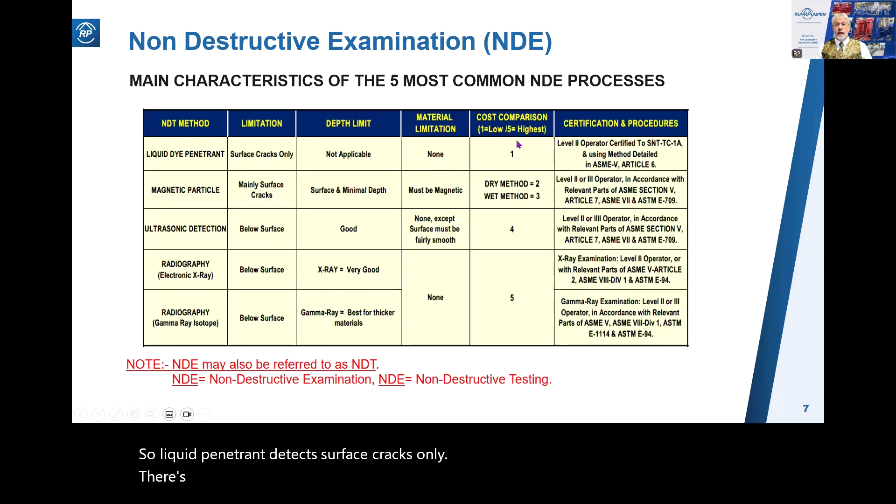Here we see the main characteristics of the 5 most common NDE processes, their limitations, and their comparative costs. Liquid penetrant detects surface cracks only, there's no material limitation, and it's the least expensive. Magnetic particle detects mainly surface cracks, but it will take some just below the surface. Material must be magnetic, and it's inexpensive.

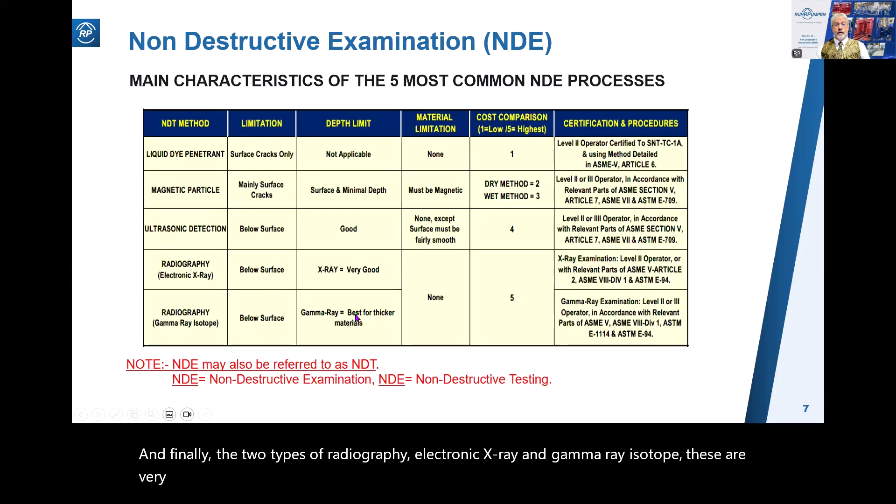Ultrasonic detection detects below-surface cracks and flaws. No material limitation except it must be fairly smooth, and it's more expensive. Finally, the 2 types of radiography, electronic X-ray and gamma ray isotope, are very good for below-surface cracks, gamma ray being better for thick materials. The cost comparison is expensive, and not just expensive, it takes a lot longer. You might turn a pump that would normally be on a 9-month delivery time into a 12-month delivery time.

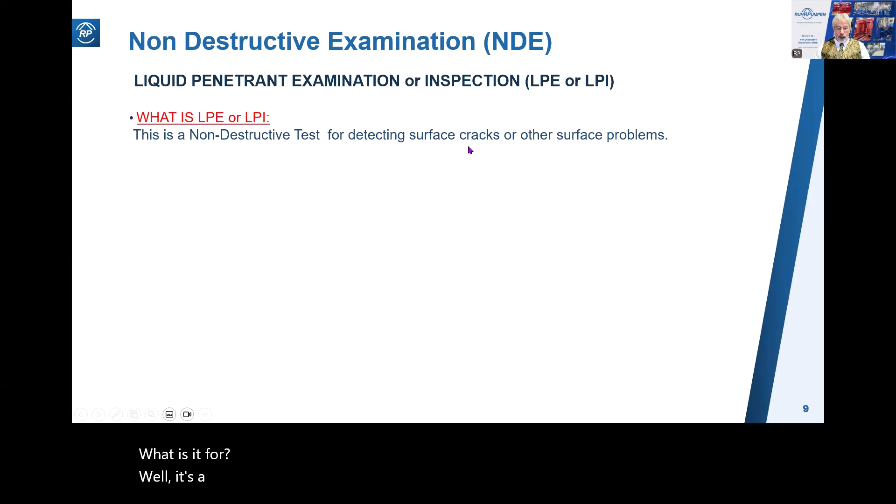So we're going to look at all of these 5 in the coming slides. We start with liquid penetrant examination or inspection. What is it for? It's a method of detecting surface cracks or surface problems. How does it work? It's based on the idea of surface tension and capillary action.

A thin liquid is spread over a crack, and the resulting capillary action will draw the liquid into the crack. Then, by removing the excess liquid from the surface, the liquid remaining within the crack can be made more visible by use of a developer. This will draw the penetrant back out of the crack or flaw and allow it to be clearly seen.

So what interpretation is required? The length and the shape of the crack are clearly visible, right there in front of you. But how it was caused is not. It only detects surface flaw detection, and doesn't show how deep the crack is or how far it extends. So we would need to do excavation grinding of the part to establish the extent of the problem.

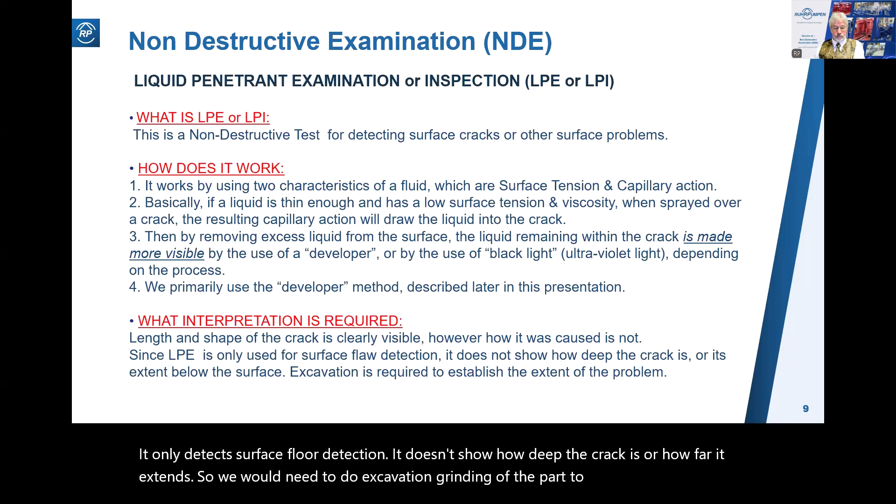These are the process steps. Pre-cleaning: you need to remove any dirt, paint, oil, grease, or any loose scales that would cause false indications. You then apply the penetrant to the surface being tested and allow it to stand for 10 to 30 minutes to allow time to soak into any flaws by capillary action.

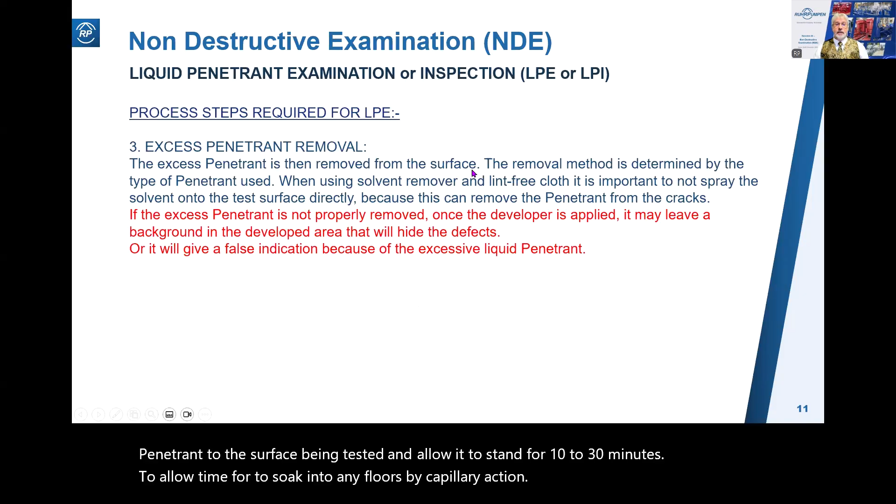Remove the excess penetrant and then apply the white developer to the sample. This draws the penetrant from the defects out onto the surface to form a visible indication.

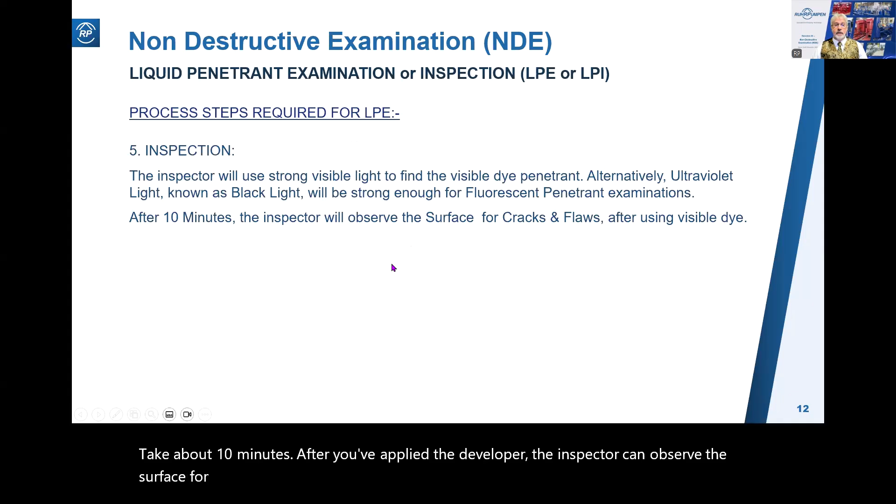Finally, inspection. Take about 10 minutes after you've applied the developer. The inspector can observe the surface for cracks and flaws. And finally, cleaning after the inspection and recording the defects. Got to remember, you're probably going to paint this pump afterwards, so you want to make sure it's nice and clean after the non-destructive examination.

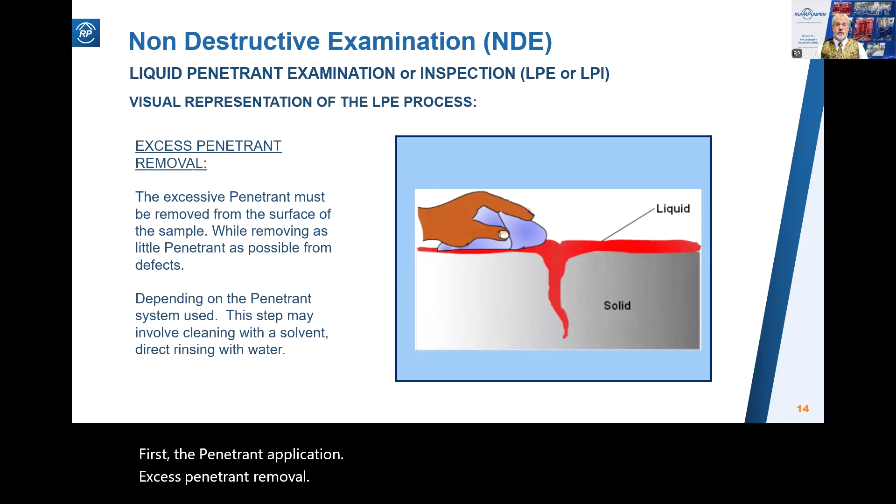So here's a visual representation of what I've just told you. First, the penetrant application. Excess penetrant removal. Application of the developer. And finally, inspection. But here are the primary advantages now.

LPE has a high sensitivity to small surface cracks. It can be used on many materials: metallic, non-metallic, magnetic, non-magnetic, conductive, and non-conductive. Important thing is, as long as they are non-absorbent.

LPE can cover large areas and large volumes. It can be inspected quickly at low cost. Even complex shaped parts can be easily inspected. The indications are produced directly on the surface of the part and show a visual representation of the cracks.

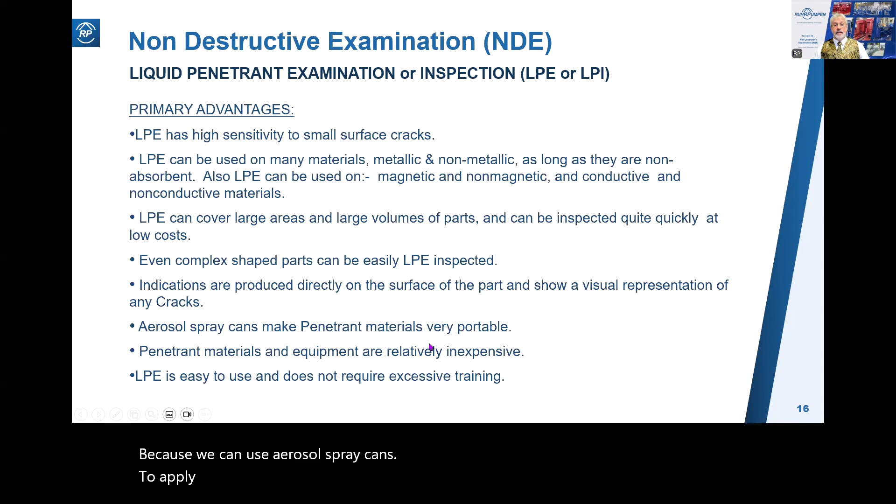Because we can use aerosol spray cans to apply the dye penetrant and the developer, it makes it very portable and inexpensive. Easy to use, doesn't require excessive training, which makes it very useful for using in pump assembly shops, for example.

The disadvantages: only surface breaking defects can be detected. It doesn't see faults that are below the surface. Must be non-porous.

Pre-cleaning is critical since paint or contaminants can hide the defects. It doesn't work on a painted piece of metal. You need to remove the paint before using LPE. Surface finish and roughness can affect the inspection sensitivity.

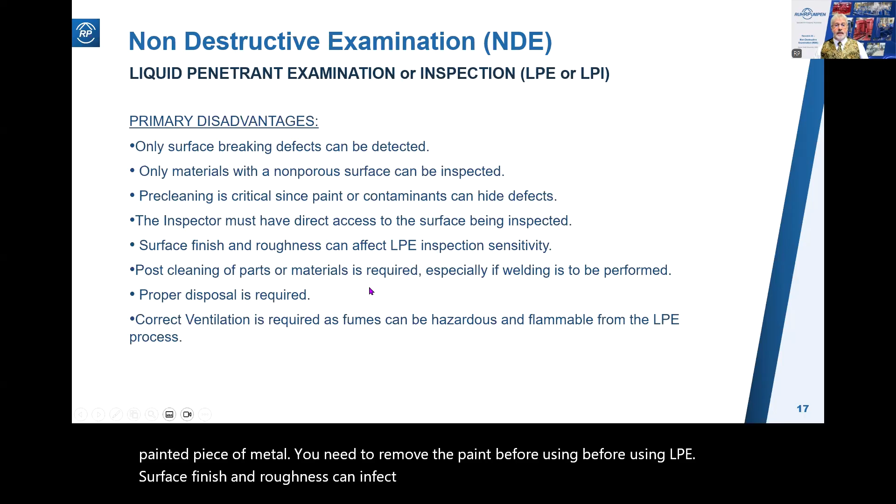Post-cleaning of parts is required, especially if you're going to be welding. But this is equally true of all the non-destructive examination techniques I'll show you today. Need to consider carefully disposal and ventilation, as the materials we're using might be hazardous and flammable.

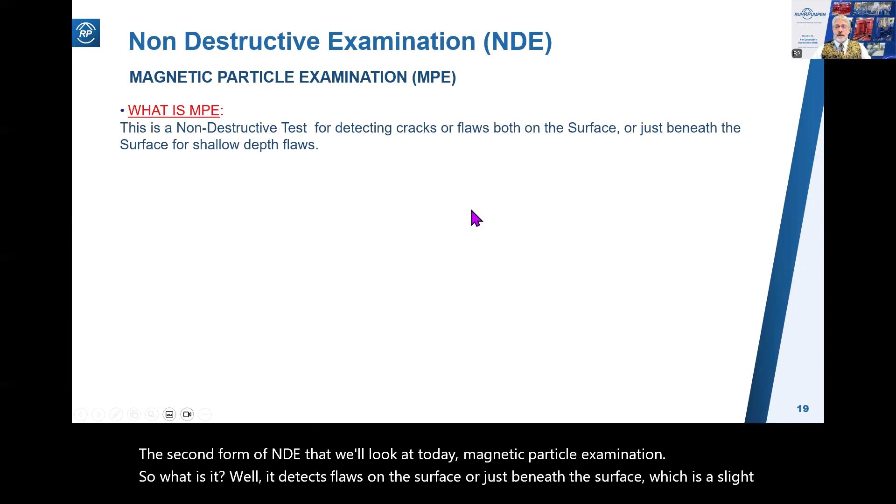So that's LPE. The next one we'll look at is MPE, magnetic particle examination. So what is it? Well, it detects flaws on the surface or just beneath the surface, which is a slight advantage over liquid penetrant examination, which will only see surface breaking cracks.

How does it work? Well, by magnetizing the part being examined. So that means it can only be used on ferromagnetic materials such as steel, iron, or nickel. The magnetic field that is invoked will change at or near a crack or flaw, which can be made visible by the use of iron filings spread over the component.

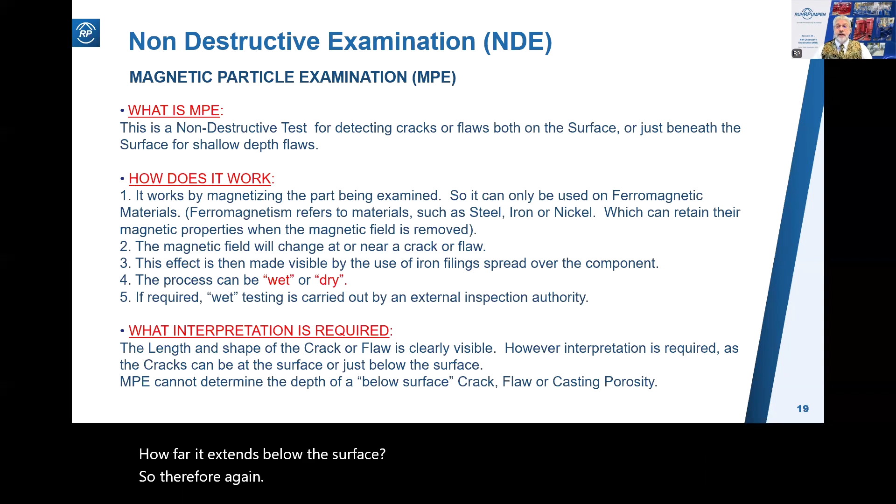What interpretation? Well, the length and the shape of the crack or flaw is clearly visible. However, some interpretation is required as the crack can be at or near the surface, and you can't see how far it extends below the surface. So therefore, further grinding and excavation is needed to see how far the flaw extends.

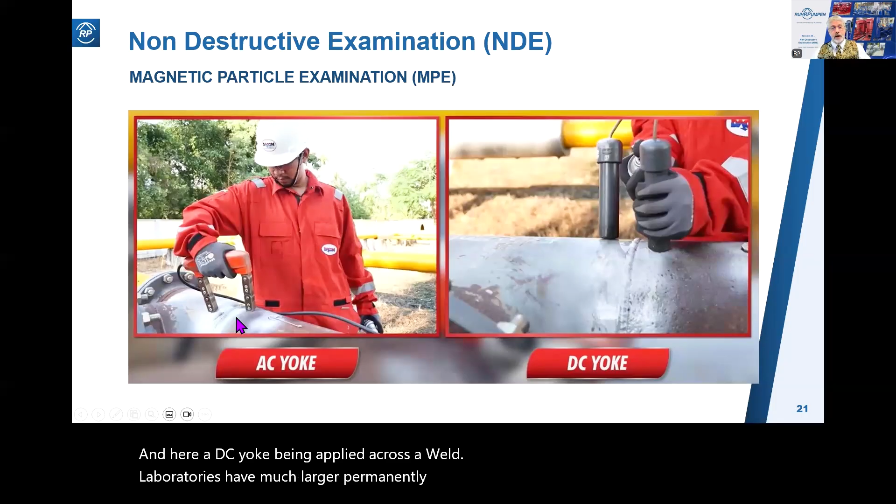Here are the tools to carry out MPE in the field or in the pump workshop. So here is an AC yoke and here a DC yoke being applied across a weld. Laboratories have much larger permanently installed machines for these, but this is typically what will be used in a pump workshop or out in the field.

So here are the process steps. Firstly, for dry magnetic particle examination, and we'll look at wet particle examination afterwards. So first, preparing the surface - it must be free of grease, oil, or other moisture, which could keep particles from moving freely within the magnetic field.

You can carry out MPE on a painted surface if the paint is not too thick. It is less sensitive than it would be on bare metal, but it will work. And this is an advantage over LPE, which cannot be used on a painted surface.

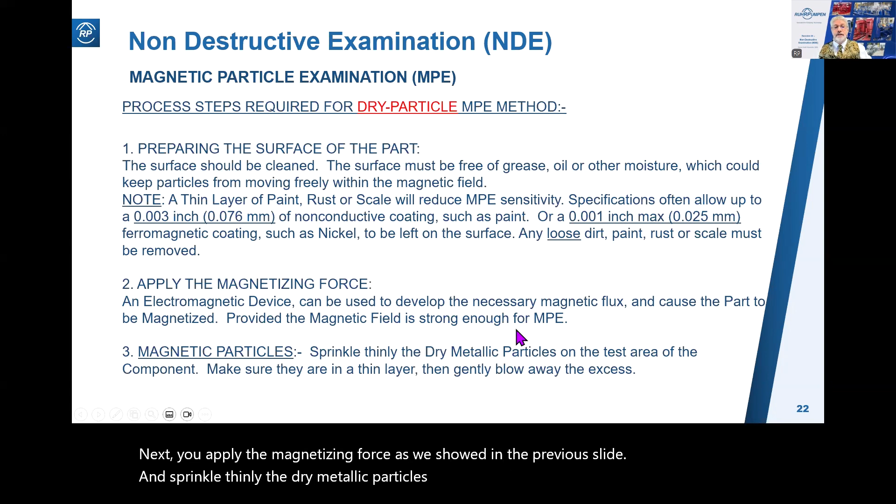Next, you apply the magnetizing force, as we showed in the previous slide, and sprinkle thinly the dry metallic particles, the iron filings, on the test area. A thin layer only, and gently blow away the excess.

Switch off the magnetizing force, and then inspect for indications. You look to see where the magnetic particles are clustered.

Note that in order to see a flaw, the flaw must be transverse to the magnetic flux. In other words, the magnetic field lines, the magnetic flux, runs in this direction, so it will only detect a crack that is at right angles to the direction of the magnetic field. This means cracks and flaws in line with the magnetic flux won't be detected.

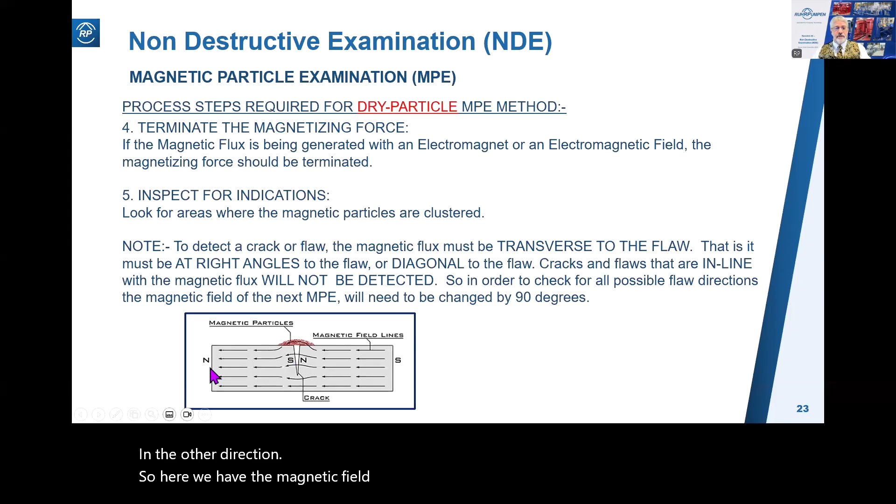So what you'd have to do is a second test in the other direction. Here we have the magnetic field running from right to left. We'd have to do one running from top to bottom in order to see the other cracks and flaws in the other direction. It's then essential that we carry out demagnetization before repeating this test at 90 degrees, or before moving on to the next process in production. I'll cover demagnetization in a few slides' time.

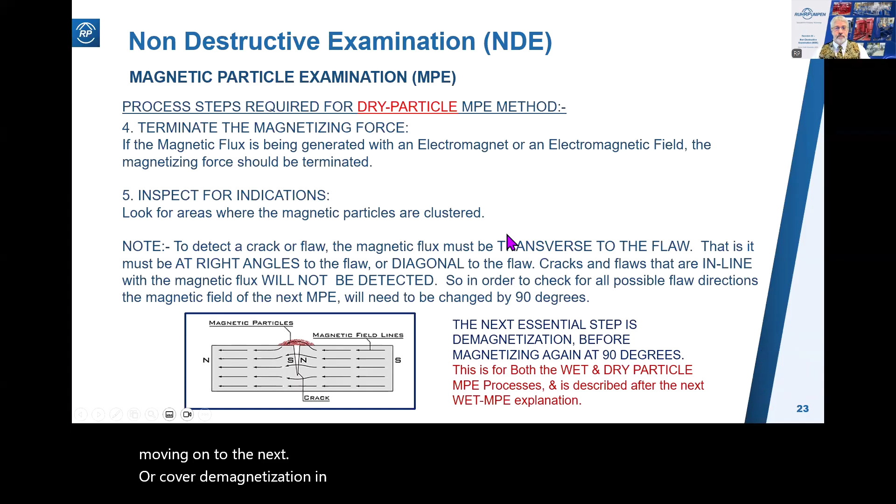The wet particle MPE method: we use smaller wet suspension particles in a carrier liquid rather than dry particles. Wet particles are smaller than the dry particles, the iron filings.

The advantages wet particle has over dry particle MPE: you can quickly spray a uniform layer of particles over the entire surface of the component, even large areas. The liquid carrier allows the small wet particles to float into small cracks, so it's considered better than dry particles for detecting very small cracks on smooth surfaces.

It comes in two types, fluorescent and non-fluorescent. The fluorescent ones glow in the dark when exposed to ultraviolet light, making it easier to detect surface faults in the component. We'll show that in a few slides' time.

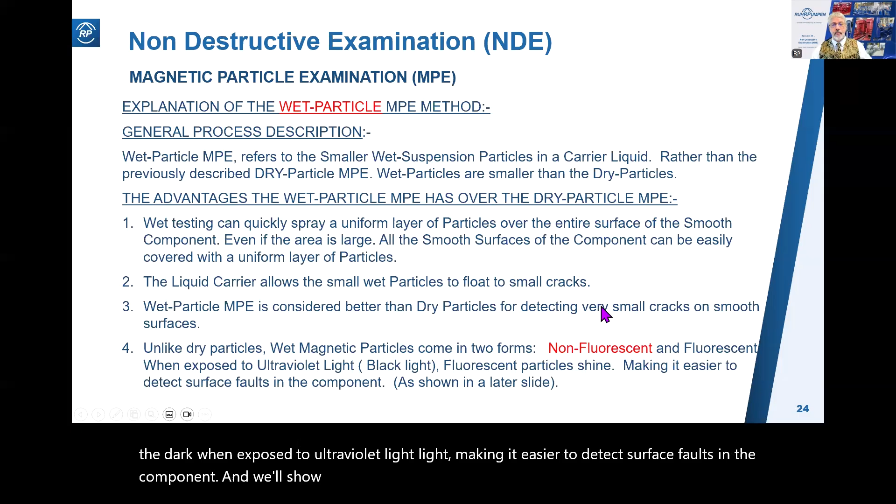These are the process steps for the wet particle MPE method. It's a little different from the dry particle method. First is the same: preparing the surface of the part. It must be free from grease, oil, and moisture. A thin layer of paint will be okay.

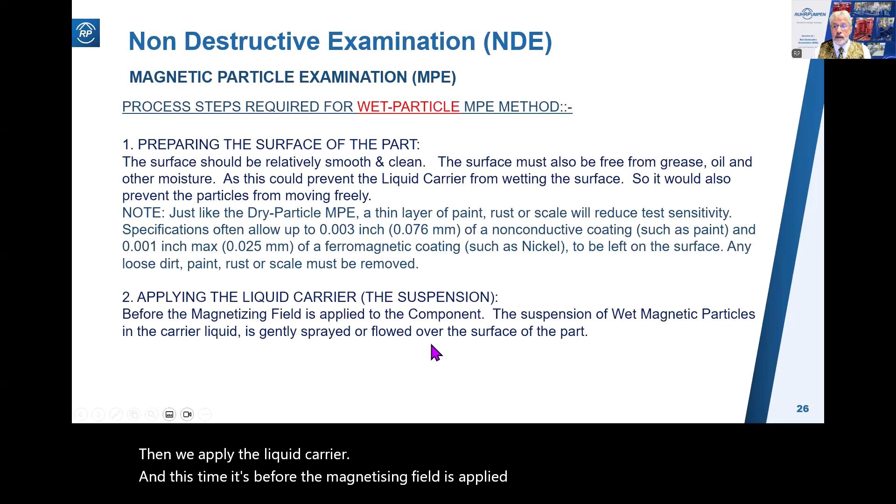Then we apply the liquid carrier. This time it's before the magnetizing field is applied to the component. The suspension of wet magnetic particles is gently sprayed or flowed over the surface of the part.

Then we apply the magnetizing force. It's applied in 2 or 3 short bursts, 2-second bursts. The resulting kinetic energy makes the wet particles overcome surface tension and viscosity and allows them to flow over the component and into any flaws that should be there.

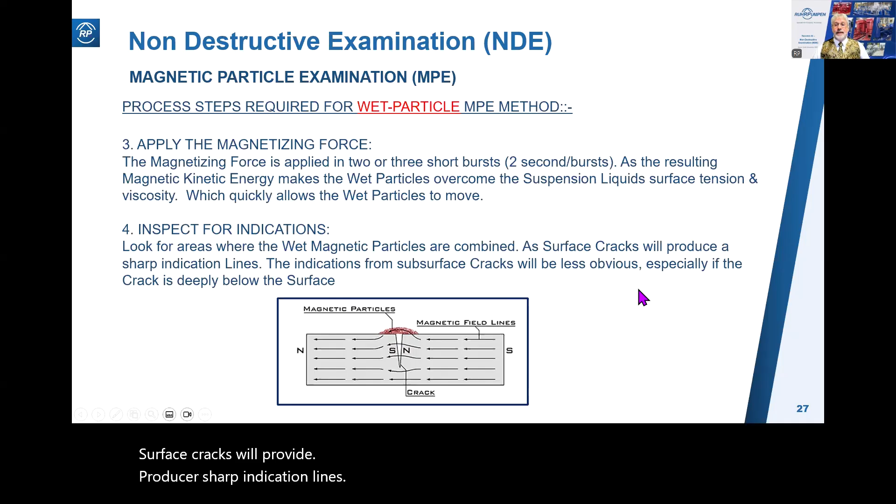Then we inspect for indications. We look for the areas where the wet magnetic particles are combined. Surface cracks will produce sharp indication lines. Subsurface cracks will be less obvious, especially if the crack is deeply below the surface.

Again, the magnetic flux must be transverse to the flaw. In other words, the flaw must be at right angles to the magnetic flux. If they're in line, they won't be detected. So then we need to do a second test at right angles to the first one.

We terminate the magnetizing force and then demagnetize the tested component. This is very important, critically important. If magnetization is left in the component, and welding is going to be performed, you can create a condition called arc blow, which can cause the welding arc to be deflected and the molten filler metal may be repelled from the weld.

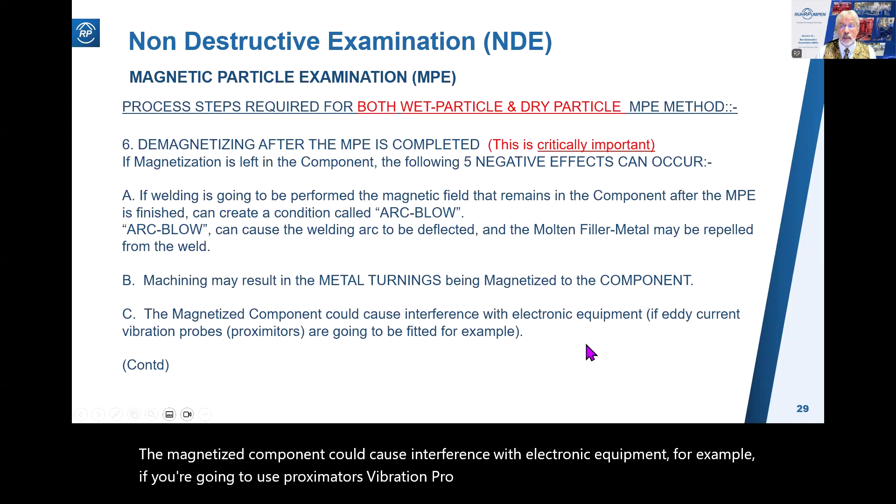Secondly, any machining could result in metal turnings being magnetized to the component. The magnetized component could cause interference with electronic equipment. For example, if you're going to use proximitors, eddy current vibration probes, they would be interfered with by the magnetic field.

Assembly with other components could be made more difficult by magnetic attraction between components, and it could also cause abrasive particles to cling to bearings or wear surfaces.

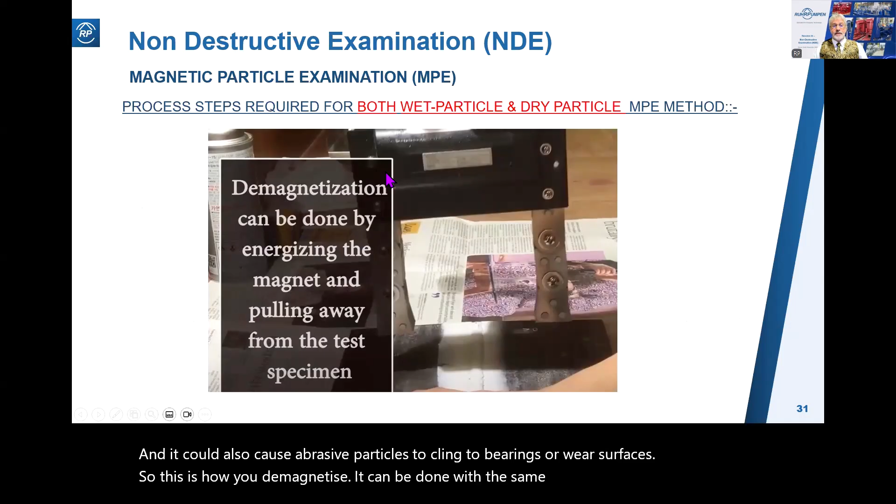So this is how you demagnetize. It can be done with the same yoke used to magnetize it: you energize it and then pull it away vertically from the test specimen. You might have to do this 3 or 4 times.

You do a residual magnetism check using a Gauss meter to confirm the demagnetization and that there's no residual magnetism left. You'd apply it and check the whole area around where you've done the magnetization.

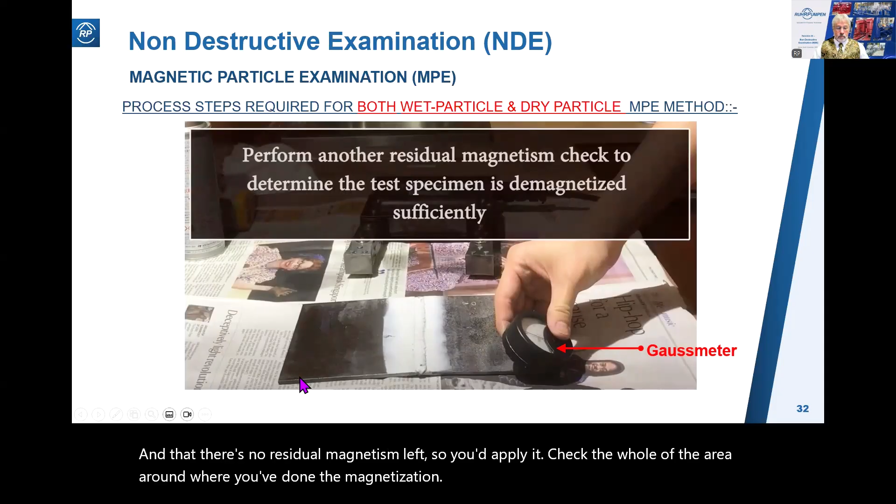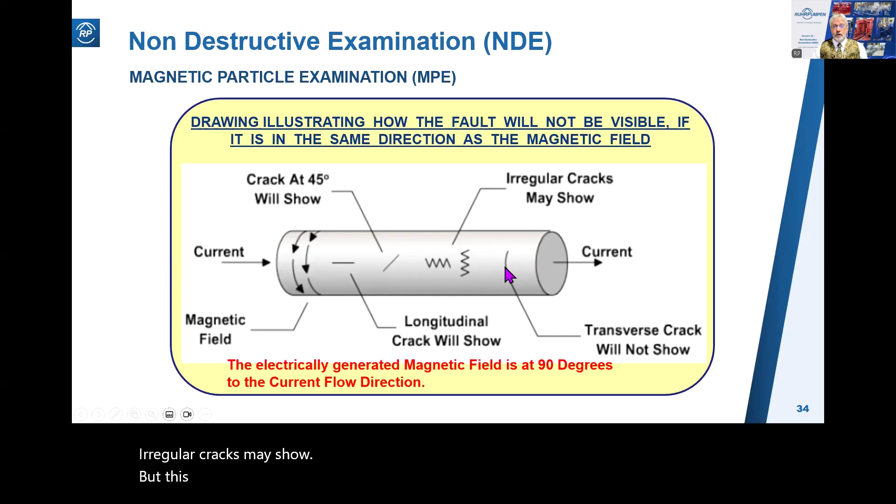This slide illustrates how a fault will not be visible if it's in the same direction as the magnetic field. Here we have the current going from left to right, so the magnetic field is vertical. The longitudinal crack will show, this diagonal crack will show, and irregular cracks may show, but this transverse crack will not show. What we have to do is demagnetize and remagnetize with the current going top to bottom so that the magnetic flux is along the shaft. Then this transverse crack effectively becomes a longitudinal crack as far as the analysis is concerned.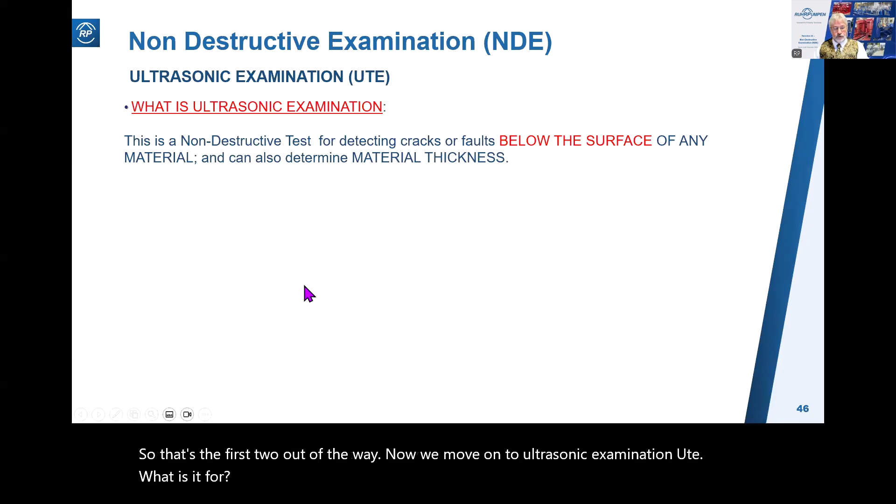So that's the first two out of the way. Now we move on to ultrasonic examination, UTE. What is it for? It detects below-surface cracks. How does it work? It works by bouncing a high frequency sound wave off any subsurface discontinuity. Any crack or fault within the component will cause a change in the reflection of this ultrasonic signal, which shows up on the diagnostic machine. The signal reflection and strength can be used to determine the depth, size, and shape of the crack or fault.

It does take a lot of skill and training. Pump suppliers will seldom have this expertise in-house. They'll usually bring in a specialist contractor or send the part to be examined to a laboratory.

There are two modes of operation: reflection and attenuation. First, we'll look at the reflection technique, which uses a single transducer as both sender and receiver. Here's the transducer sending out a signal which bounces off the back face of the sample back to the receiver. Here again, this time there's a crack in the way, so it's bouncing off the crack back, and it'll tell us how big and where that crack is.

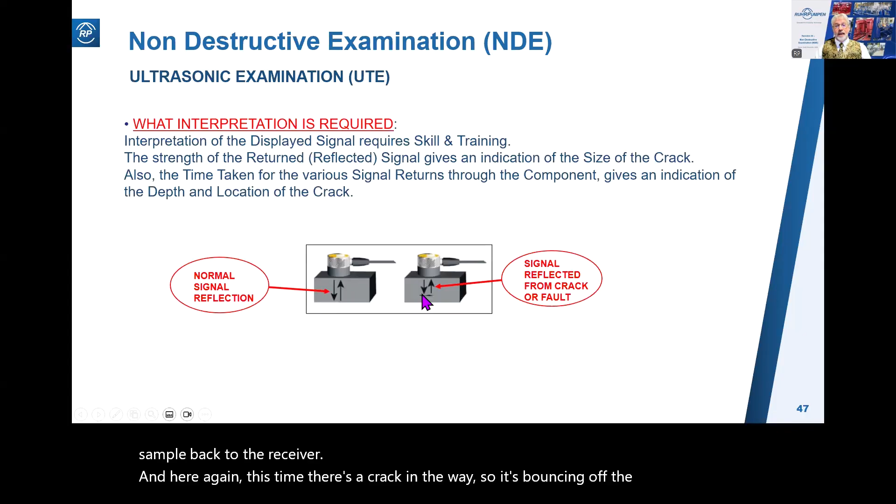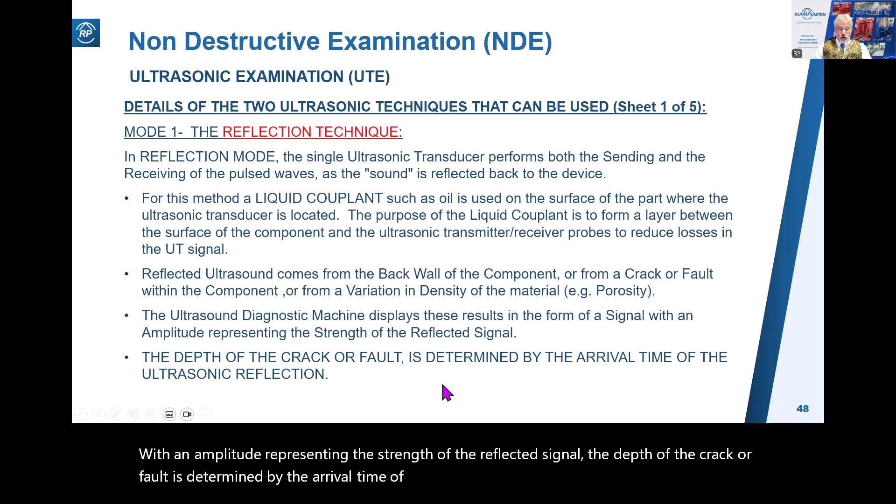For this method, a liquid couplant, such as oil, is used on the surface of the part where the transducer is located, to ensure you've got a good clean signal going through. The reflected ultrasound comes from the back wall of the component, or from a crack or fault within the component, or indeed from variation in density, from porosity. The diagnostic machine displays these results as a signal with an amplitude representing the strength of the reflected signal. The depth of the crack or fault is determined by the arrival time of the ultrasonic reflection. And that's the joy of UTE - you get to see how deep within the component the flaw is. You don't get that with LPE or MPE or even RXE.

Now, the attenuation technique uses two probes, a transmitter and a receiver. The transmitter sends the ultrasound through one surface and a separate receiver detects the amount that has reached it on the opposite surface after traveling through the component. This time we need to put liquid couplant on both surfaces. Cracks or faults in the space between the probes allow the depth of the cracks and faults to be detected.

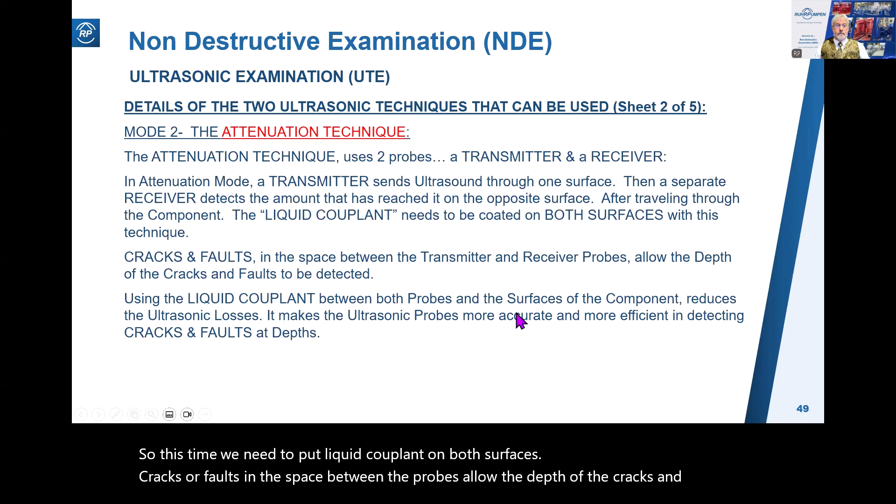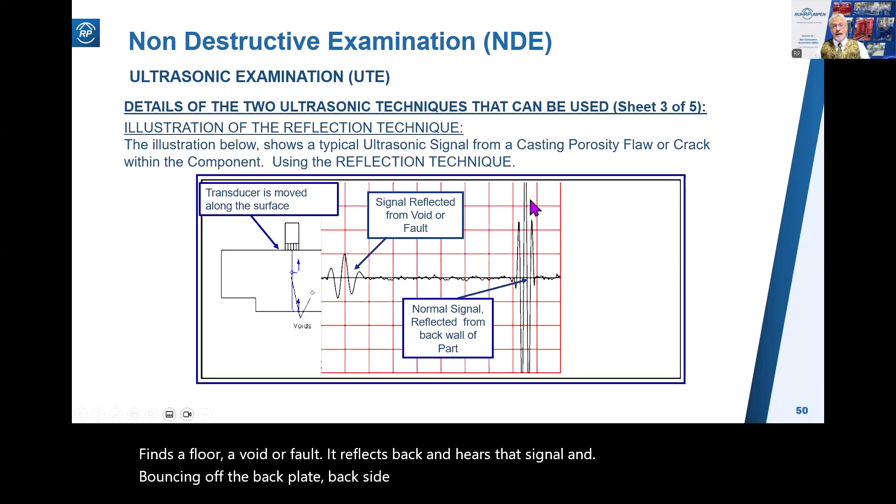Here's an example illustrating the reflection technique. The transducer moves along the surface of the component, and when it finds a flaw, a void, or fault, it reflects back - here's that signal - and bouncing off the back side of the sample is this normal signal. So that's a reflection off the back wall, and there's the reflection off the flaw.

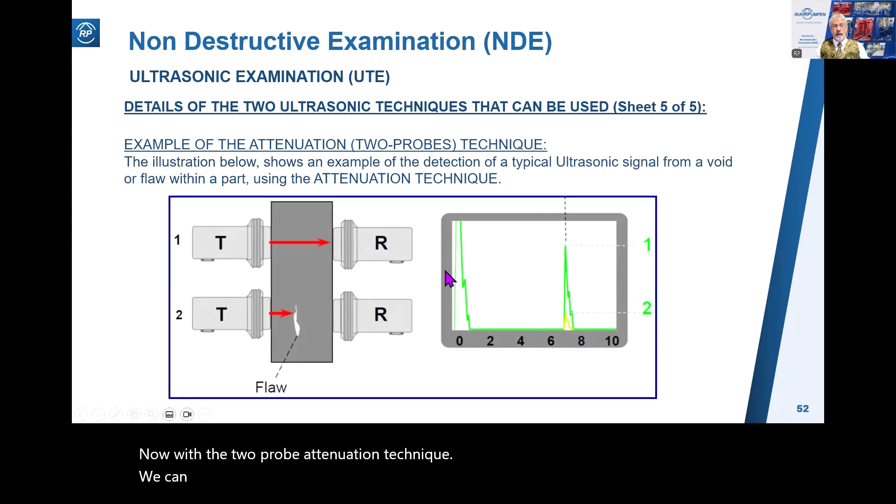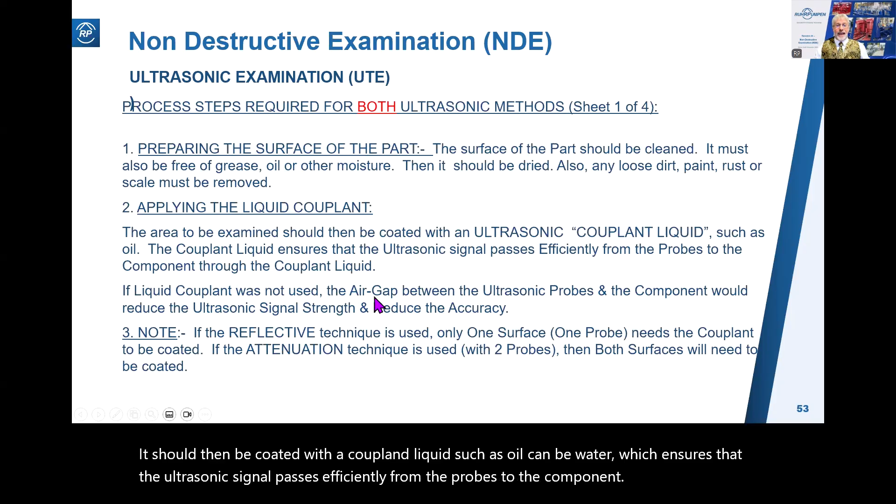If we're using the reflective technique, then only one surface needs couplant. If the attenuation technique is used, then both surfaces need to be coated.

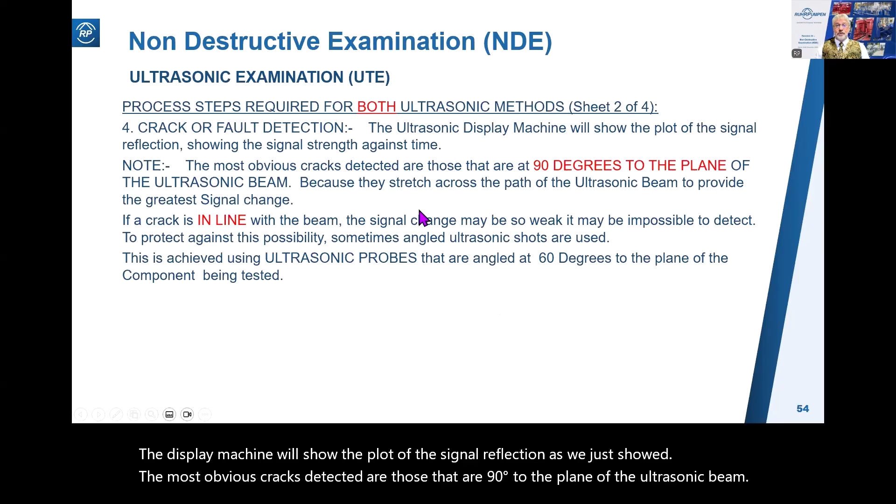The display machine will show the plot of the signal reflection as we just showed. The most obvious cracks detected are those that are 90 degrees to the plane of the ultrasonic beam, because they stretch across the path of the ultrasonic beam. If it's in line, the signal change may be so weak it may not be detected properly.

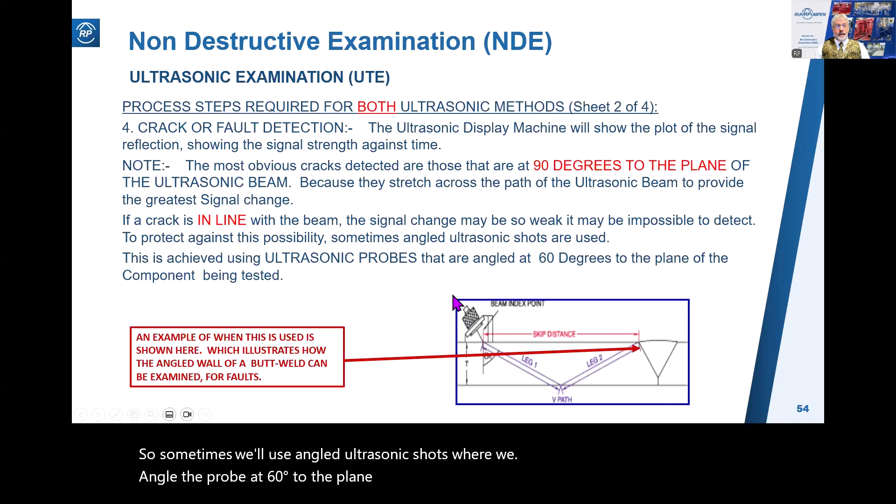So sometimes we'll use angled ultrasonic shots, where we angle the probe at 60 degrees to the plane of the component being tested. Like this, we're looking at a weld here, examining a weld. Here's the signal being sent in at 60 degrees, bounces off the back face, bounces off the weld back to the transducer.

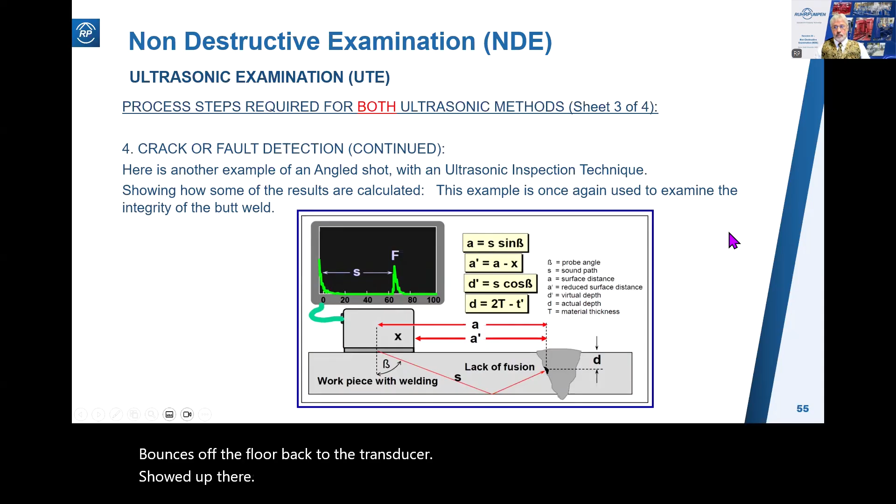Next stage, as usual, it's cleanup.

Here are the advantages of ultrasonic. 7 points showing the advantages. It has a high penetrating power, which allows detection of cracks and flaws that are quite deep in the component.

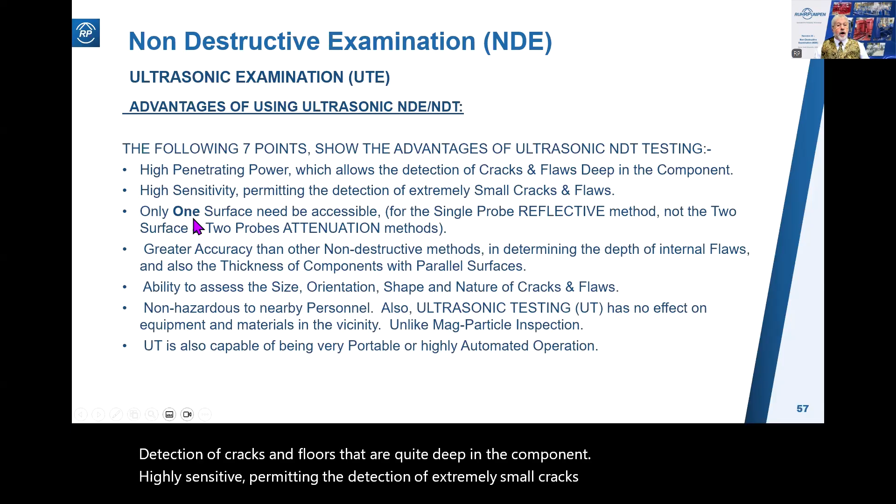Highly sensitive, permitting the detection of extremely small cracks and flaws. You only need one surface to be accessible, although you do get better results with the 2-probe attenuation method. But you can get good results with one surface.

It has greater accuracy than other non-destructive methods in determining the depth of internal flaws. It'll also detect the thickness of components that have parallel surfaces.

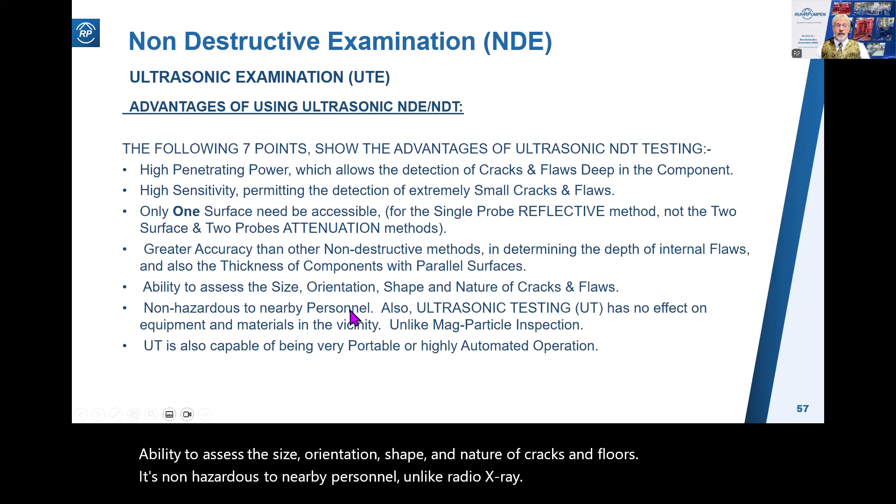Ability to assess the size, orientation, shape, and nature of cracks and flaws. It's non-hazardous to nearby personnel, unlike X-ray, where we're handling radioactive materials. And ultrasonic testing has no effect on the equipment and materials in the vicinity, unlike mag particle examination. It's also very portable and can be automated.

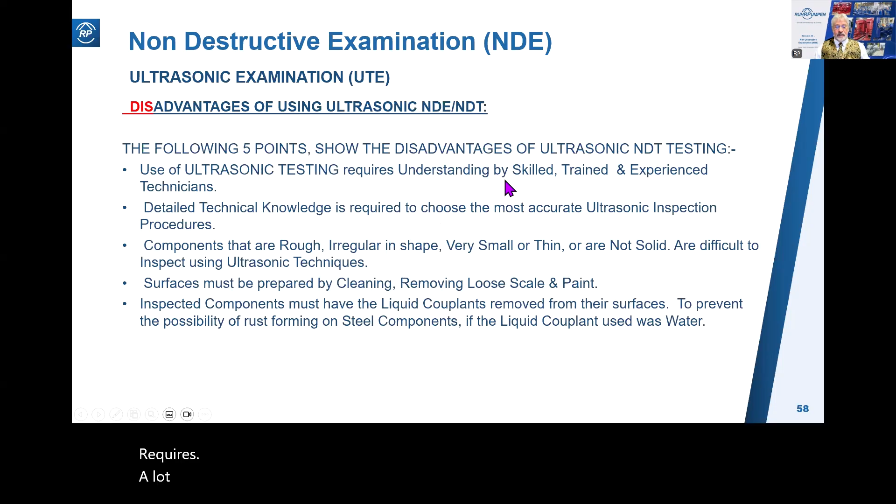The disadvantages: it requires a lot of understanding, skill and training, which pump suppliers will seldom have this expertise in-house. They'll usually bring in a specialist contractor or send the part to be examined in a laboratory.

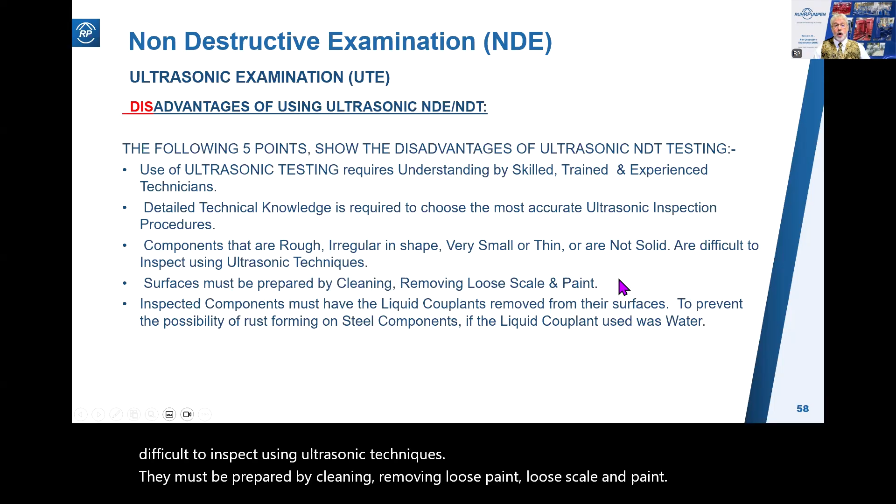Components that are rough, irregular in shape, very small or thin, or are not solid — these are difficult to inspect using ultrasonic techniques. They must be prepared by cleaning, removing loose scale and paint. Thin layers of paint are okay, but avoid any loose scale and loose paint.

That's UTE. The next one we'll be looking at is radiographic examination.

I'm just going to have a slurp of tea.

So radiographic examination, RXE. What is it for? It detects below surface cracks and defects. Again, it takes a lot of skill and training.

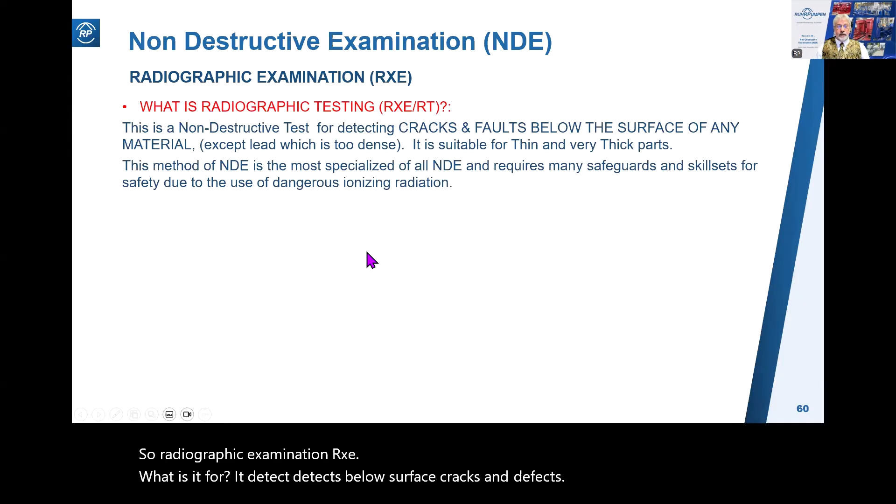How does it work? Two methods. Electronically produced X-rays by an X-ray generator — that's a bit like the X-ray generator at your dentist's. And the more powerful one is gamma rays issued by a radioactive isotope, which is better for very thick and heavy metal components.

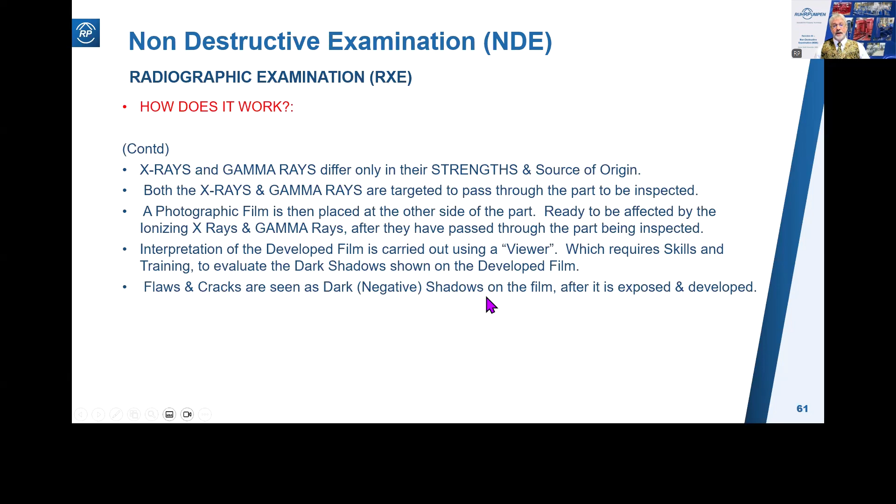In both cases, we are targeting the X-rays to pass through the part to be inspected. A photographic film is placed on the other side of the part, ready to be affected by the X-rays and gamma rays after they've passed through the part being inspected. The film is developed and then interpretation is carried out using a viewer, which requires skill and training to evaluate the dark shadows that appear. Flaws and cracks are seen as negative shadows on the film after it's exposed and developed.

So here are the two methods. The first one, the X-ray generation method.

Cathode ray tube contains a small filament similar to a light bulb. The electric current passing through the filament heats up and causes electrons to be stripped off.

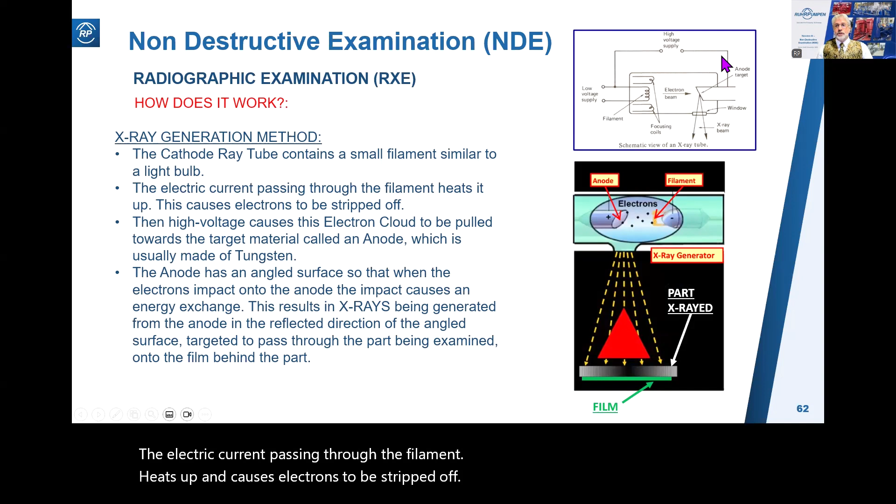The high voltage across this gap causes the electron cloud to be pulled towards the target anode, which is usually made of tungsten. The anode has an angled surface so that when the electrons impact on the anode, the impact causes X-rays to be generated from the anode in the reflected direction of the angled surface, so down in this case, through the part being X-rayed and impinging on the film.

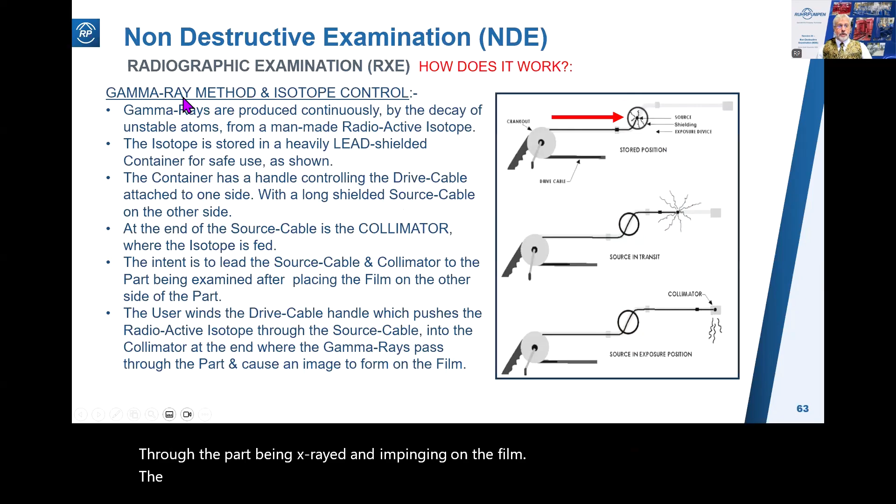The other method is the gamma ray method. Gamma rays are produced by man-made radioactive isotopes. The isotope is stored in a heavily lead-shielded container for safe use. The user winds the drive cable, which pushes the radioactive isotope through the source cable into the collimator.

Here, the collimator is where the gamma rays pass through the part, shown here in red, and cause an image to be shown on the film, shown in green here. The radiographic film is coated with silver bromide. Once it's exposed and developed in a darkroom, the silver bromide turns to black metallic silver, which forms the image, as shown here.

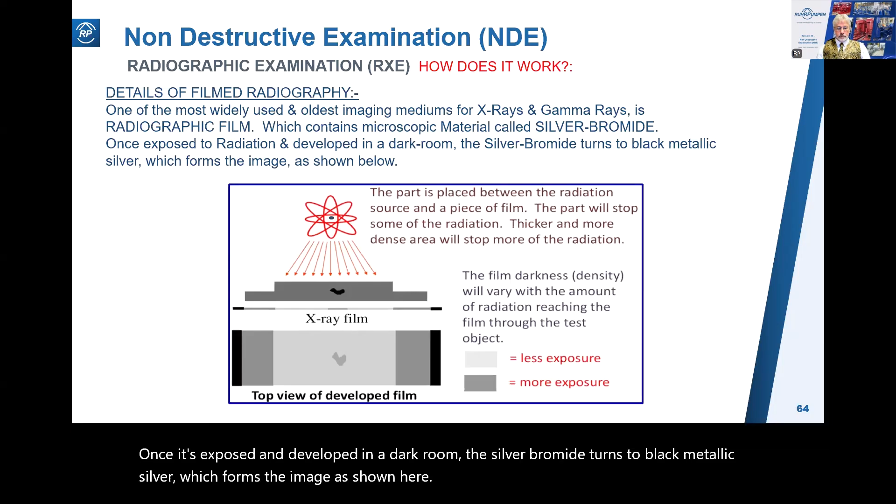Image quality indicators are required. They're also known as penetrameters and comparators, and they are usually placed on or next to the part being examined. They act as a frame of reference to analyze the samples. They're of known size and penetrability, which helps the inspector analyze the indications that he sees.

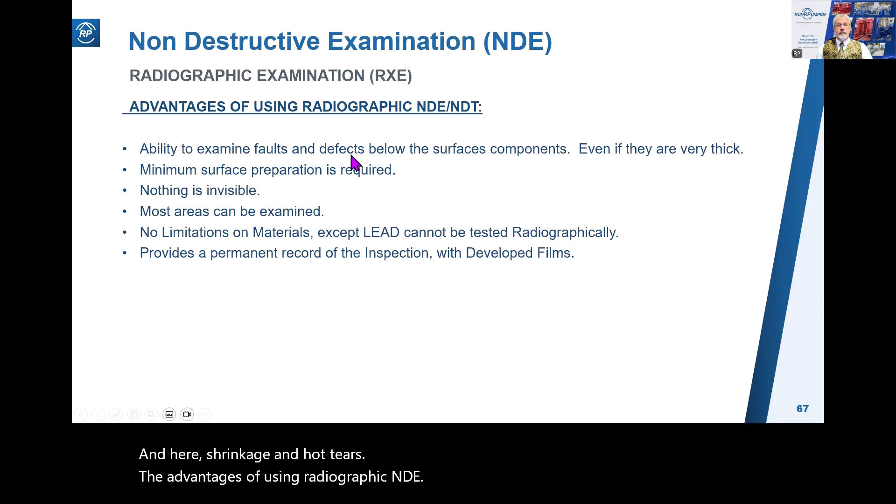The advantages of using radiographic NDE: they detect faults below the surface of components, even if they're very thick. Minimal surface preparation is required. Nothing is invisible; most areas can be examined. There are no limitations on materials, except lead, obviously. And you get a permanent record of the inspection with the developed films, which can be kept in the pump record book.

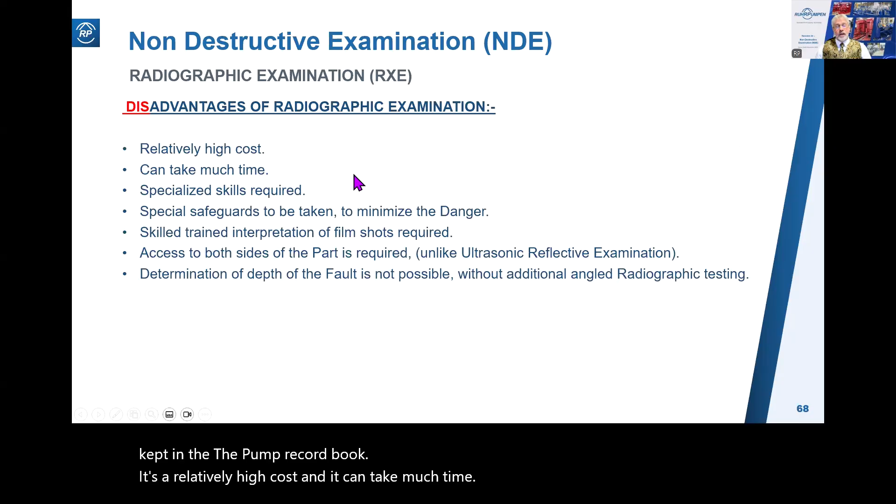Disadvantages: well, it's a relatively high cost and it can take much time. Most pump companies don't have foundries which have the ability to do this sort of work, which means you're going to premium foundries to get this work done, which will mean high price and long lead time. A lot of specialized skills are required, and safeguards need to be taken to minimize the danger, since you're dealing with radioactive substances here. You also need access to both sides of the part.

So we've now looked at all 5 of the NDE procedures that we needed to cover. But the question we want to ask now is, what does API 610 require? Which boxes do you need to check on that data sheet? Well, here is table 14 from API 610, and it gives you 3 classes of inspection: 1, 2, and 3, with 1 being minimum and 3 being the highest level of inspection.

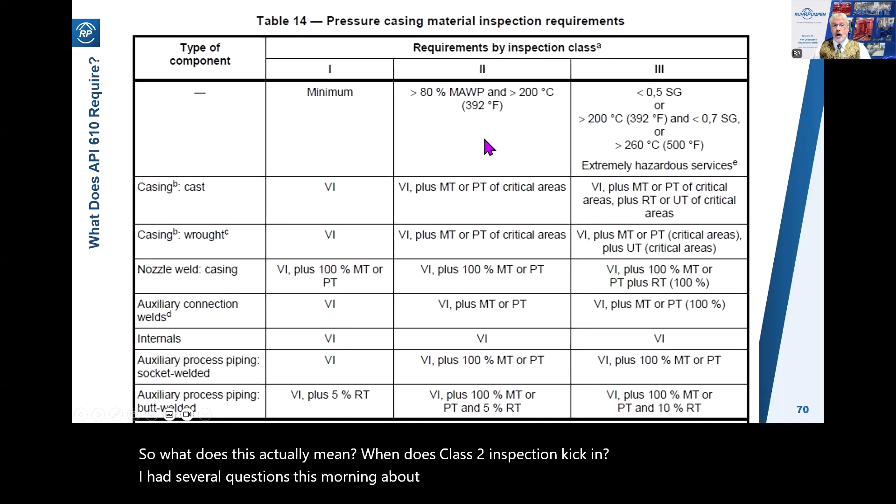Class 2 inspection kicks in at 80% MAWP and greater than 200 degrees centigrade. So what does this actually mean? When does class 2 inspection kick in? I had several questions this morning about this, that people aren't clear of what that means, and I can agree, it's not too clever. So I prepared some more slides on this one.

The procedures you need to take to decide which class of inspection applies: first, you calculate your required max allowable working pressure from your process conditions, which is shut-off pressure plus 10%, plus the max suction pressure, and you do all these calculations with the max SG of the fluid. So that gives you the process required max allowable working pressure.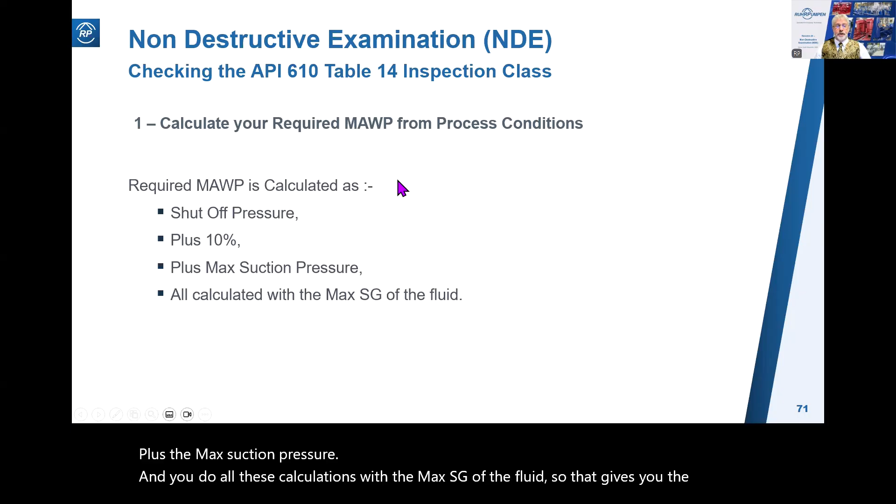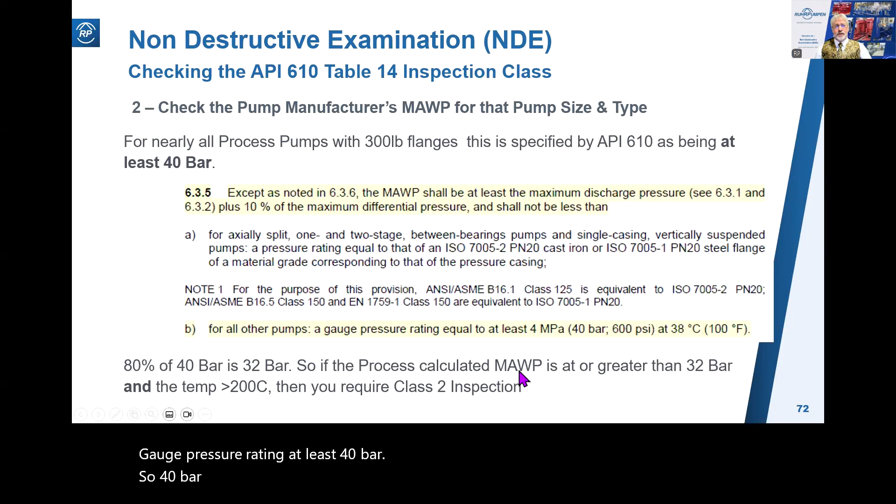Next, we check the pump manufacturer's max allowable working pressure for that pump size and type. For nearly all process pumps with 300-pound flanges, so that'll be OH2s and BB2s, this is specified by API 610 as being at least 40 bar. Here's the clause where it says it, 6.3.5, gauge pressure rating at least 40 bar. So 40 bar is your max allowable working pressure, and 80% of 40 bar is 32 bar.

So if the process calculated max allowable working pressure is at or greater than 32 bar, and the temperature is greater than 200 degrees centigrade, then you require class 2 inspection.

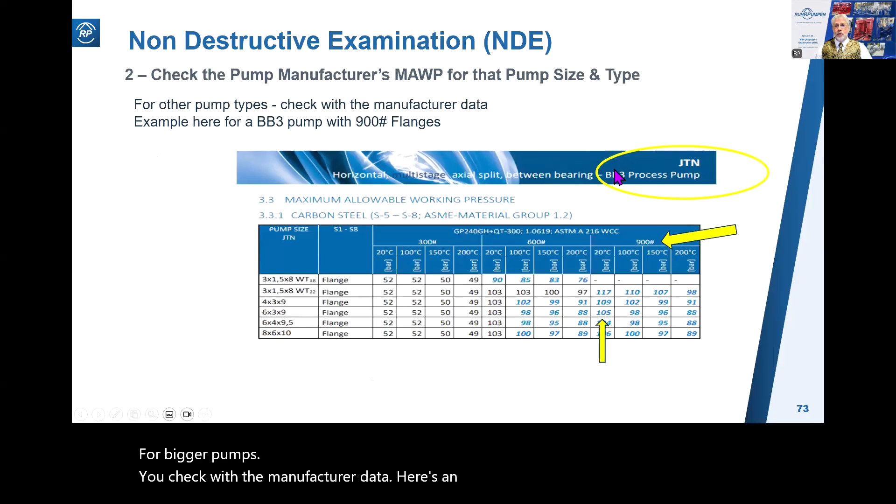For bigger pumps, you check with the manufacturer data. Here's an example of a BB3 pump with 900-pound flanges. In this example, we see the pump design pressure, MAWP, is 105 bar. 80% of 105 bar is 84 bar. So in this instance, if the process calculated max allowable working pressure is at or greater than 84 bar, and the temperature is greater than 200 degrees centigrade, then you require class 2 inspection.

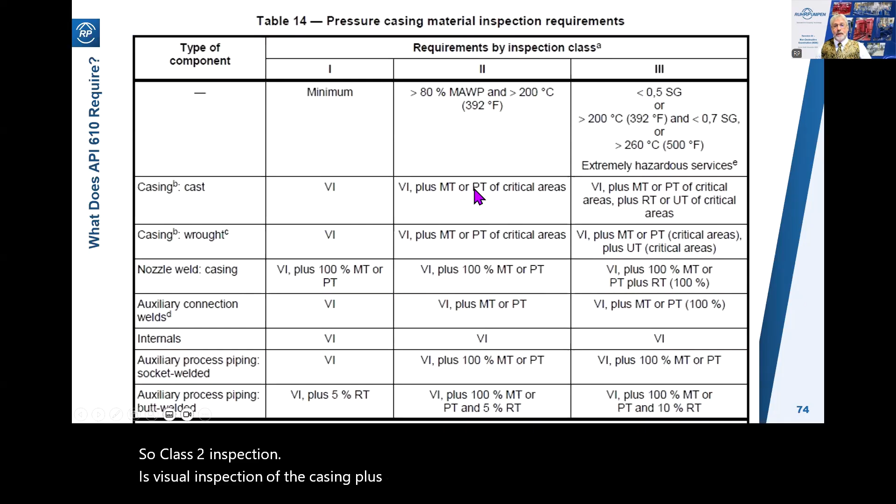So class 2 inspection is visual inspection of the casing plus magnetic particle or liquid penetrant of critical areas. What are critical areas? Well, that's defined in the footnotes of that table. Critical areas are inlet nozzle locations, outlet nozzle locations, and casing wall thickness changes.

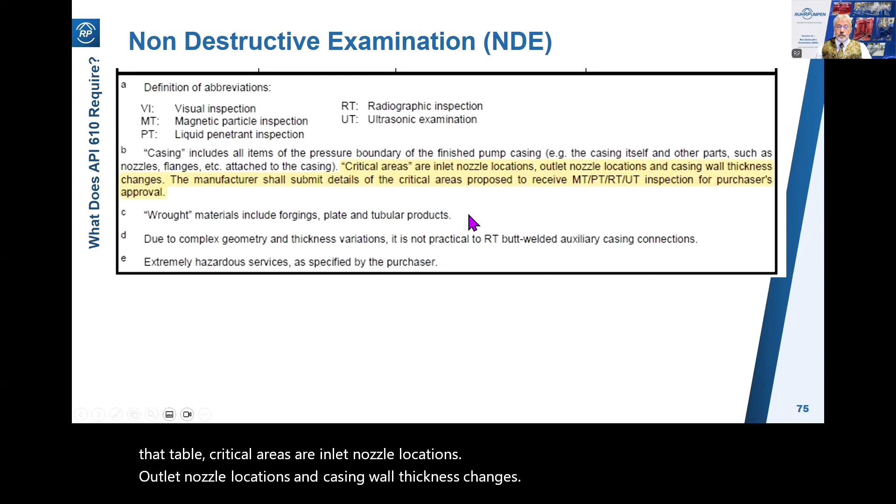Depending on who you talk to and the complexity of the casting, this could be interpreted as being 100% of the casting, perhaps especially if it were a BB3 casing, which is a horizontal split case multi-stage pump. Quite a few changes in wall thickness there.

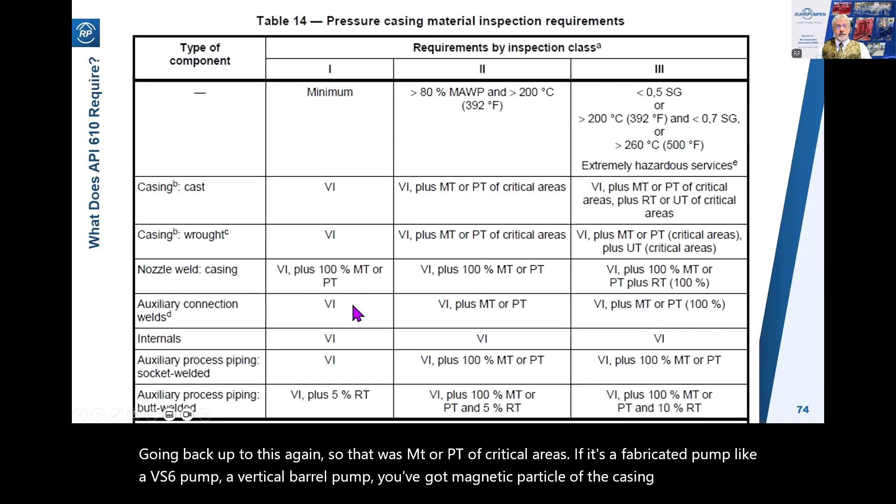So there are certain places that the customer might well insist on having inspection done. Going back up to this again, that was MT or PT of critical areas. If it's a fabricated pump, like a VS6 pump, a vertical barrel pump, you've got magnetic particle of the casing and of the nozzle welds. Here are the auxiliary connection welds, the internals, visual only, auxiliary process piping - that's your vents, your drains, your mechanical seal piping.

And if it's butt welded, a certain amount of radiography. So that's for class 2 inspection. If it was below that threshold, then class 1 inspection was just visual, pretty much down the line.

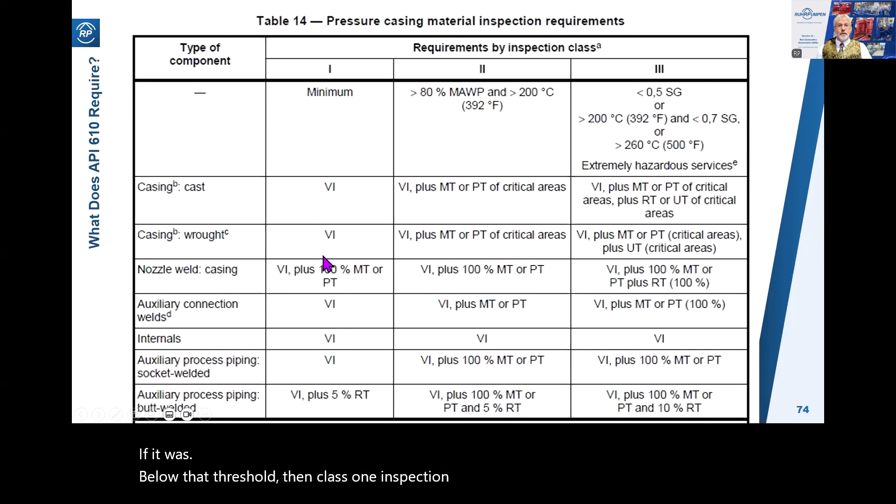And at the other end of the spectrum, class 3 inspection comes in with very light hydrocarbons, less than 0.5 SG, so that would be liquefied natural gas, for example. Or if you're greater than 200 degrees centigrade and also less than 0.7 SG, or when you're very hot, greater than 260 degrees centigrade, or in extremely hazardous services, as defined by the client himself. And then we bring in radiography down the line here.

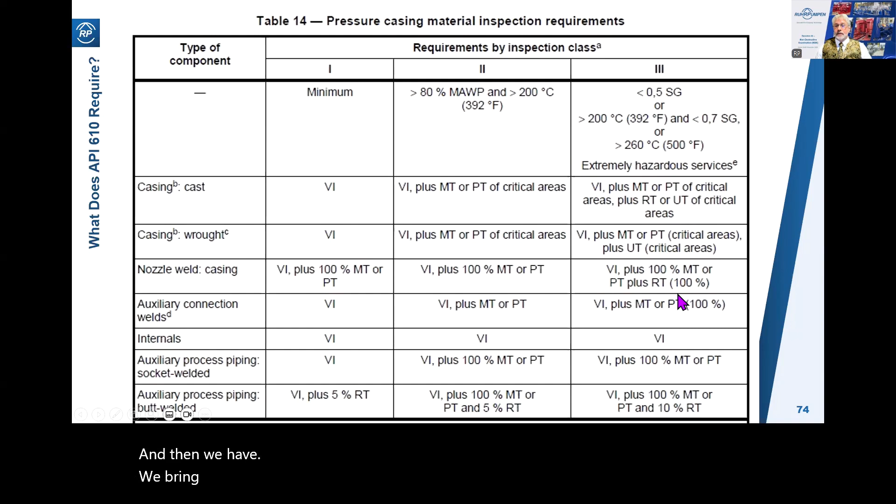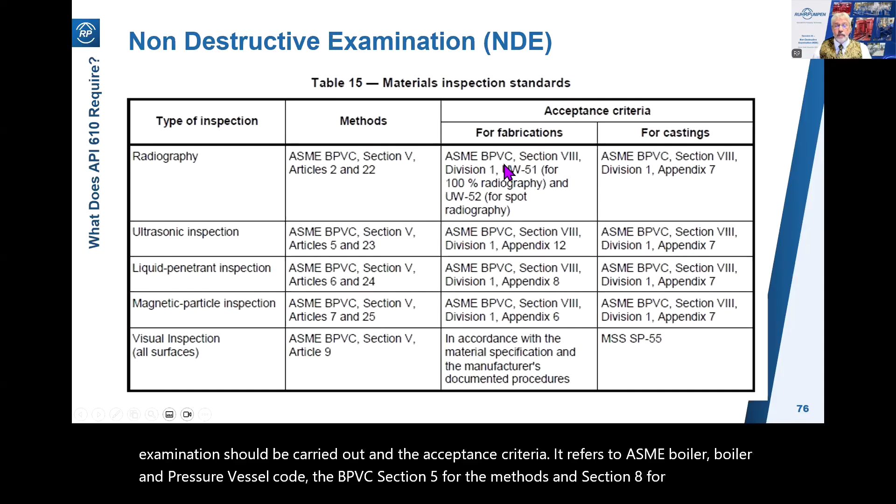Here is table 15 from API 610, which references the standards to which the non-destructive examination should be carried out and the acceptance criteria. It refers to ASME boiler and pressure vessel code, the BPVC, section 5 for the methods, and section 8 for the acceptance criteria. This will tell you when a flaw is acceptable or not, how big, how near the surface, etc.

We're nearly finished now, even though we're running late. Here is a question I posted on various pump groups on LinkedIn.

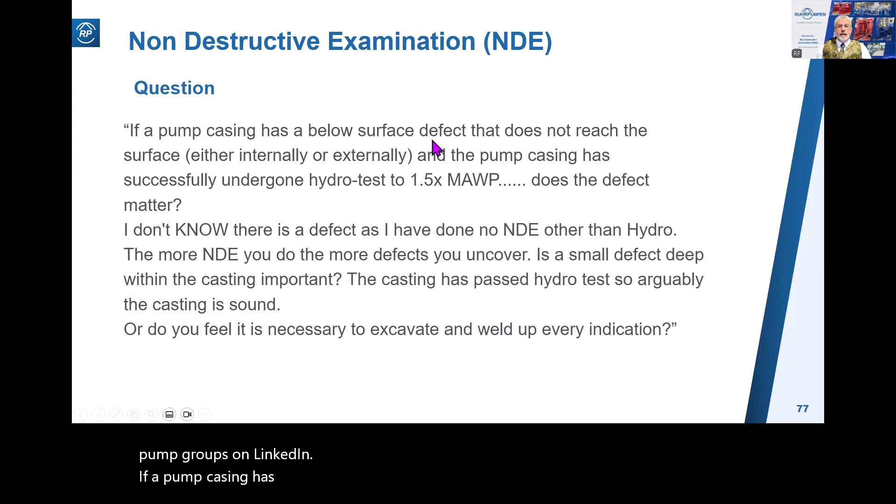If a pump casing has a below-surface defect that does not reach the surface, either internally or externally, and the pump casing has successfully undergone hydrotest to 1.5 times max allowable working pressure, does the defect matter? I don't know there's a defect, as I've done no NDE other than hydro. The more NDE you do, the more defects you uncover. So is a small defect deep within the casting important? The casting has passed hydrotest, so arguably the casting is sound. Or do you feel it's necessary to excavate and weld up every potential indication?

I got quite a few good answers, and I'll show you two of them. This first one, particularly good, from Buddy Morris, who was formerly with ITT Goulds Pumps and is now a consultant. And he says, in most cases, no. Defect is a relative term. Many castings have some kind of defect, such as inclusions, shrinkage, etc., that will not affect the performance of the casting. I'm also assuming this is a standard commercial grade casting and will meet all applicable specifications.

The customer always has the right to purchase additional NDE. There are some materials and configurations of casting where it's more or less impossible to get 100% defect-free casting. Castings do not typically fail with these types of defects. Your foundry personnel and metallurgists are aware of these issues and will work with engineering on the configuration of the casting, along with gating and risers, to eliminate or minimize this. To do extensive NDE on every casting would make the cost prohibitive and extend lead time significantly. Also, to your point, how do you repair an unknown defect? Excellent answer there from Buddy.

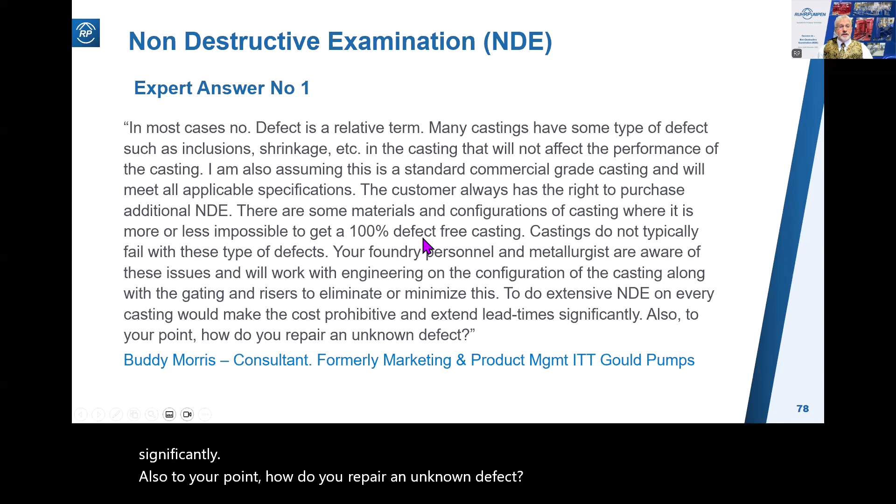And here's another answer which I really like, by Simon Bradshaw, the usual pump guru that I refer to often. And his answer was, it depends. One thing to keep in mind is that all castings are, to a greater or lesser degree, a collection of defects held together with metal. I really like that. For non-hazardous service, it doesn't generally matter. The hydrotest has verified that no gross failure will occur, regardless of how many subsurface defects exist, and they will. But for more hazardous service, it could matter, particularly if the defect became exposed due to corrosion, erosion, and then create a leak path in the pressure boundary.

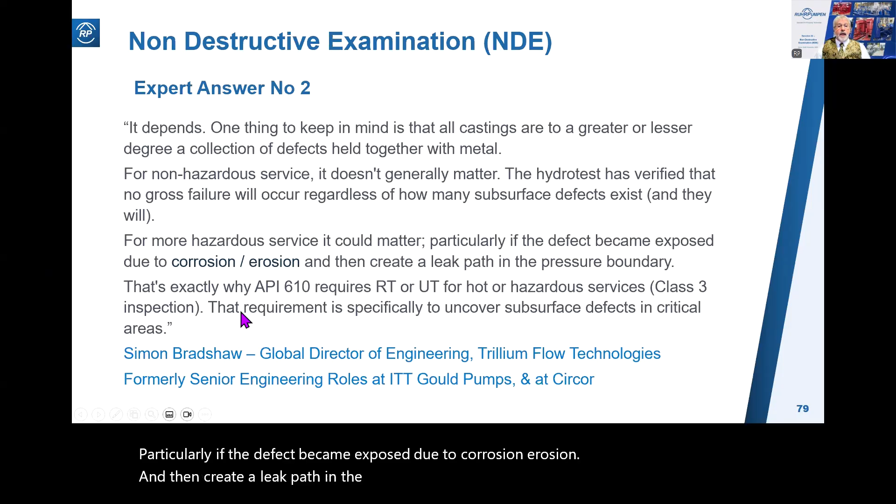And that's exactly why API 610 requires radiographic or ultrasonic testing for hot or hazardous services, class 3 inspection. That requirement is specifically to uncover subsurface defects in critical areas. So in corrosive and erosive service, these subsurface defects could become surface defects. So there you have the answer.

Well, that pretty much concludes the fun for today, and I hope you found it useful.